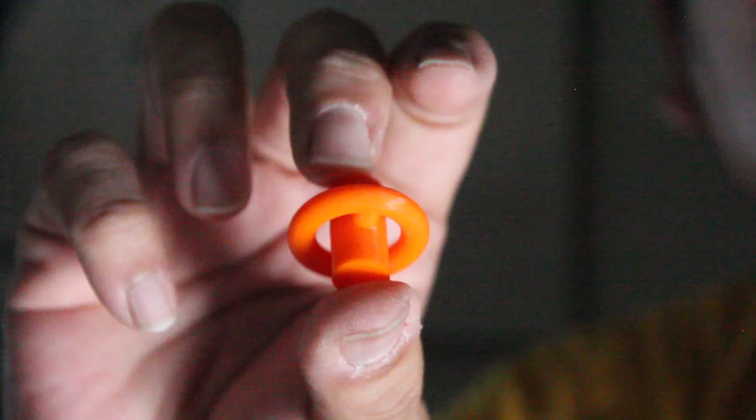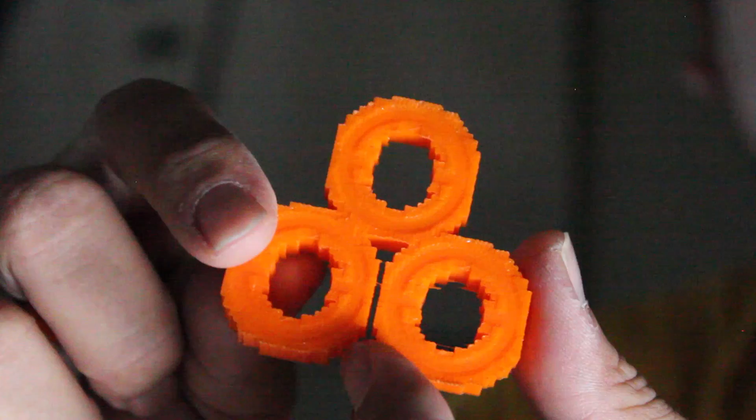This is the object I'm gonna try to explain to you, what settings I use to print it, as you can see by the supports right here. I printed 3 of these. They all came out quite alright. As you can see in this video, the print part came out really easily.

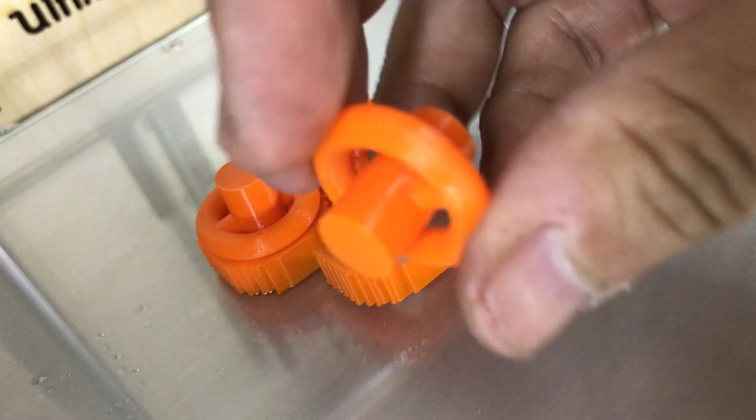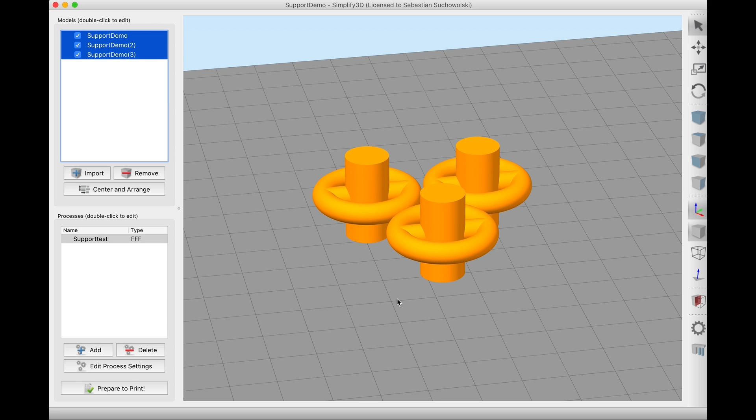Hello guys, today I'm gonna try to explain to you how to print complex objects that need supports, unless you have an Ultimaker 3, of course. But this object, for example, was a challenge from Dimensional because he printed this on an Ultimaker 3 and I told him that I was able to print this on a single head printer like the ones I have.

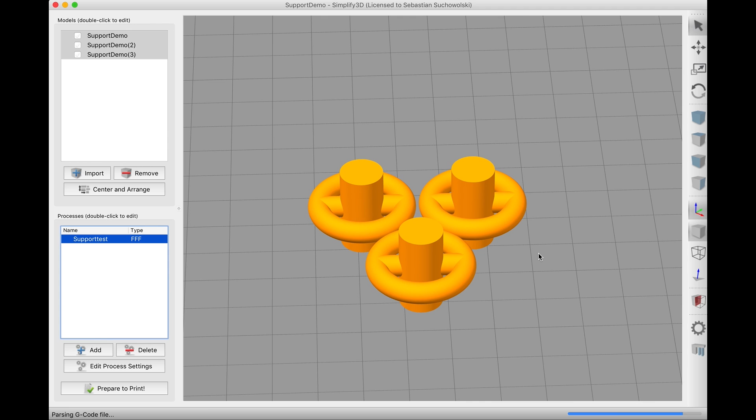So to do this, I had to use quite a few tricks on the supports, and if you see the G-code, you will see that most of the stuff is quite common, but there's a few buts. So for example, first of all, I print, as you can see by the color, everything around 30 millimeters per second, which is quite slow for what I used to like to do.

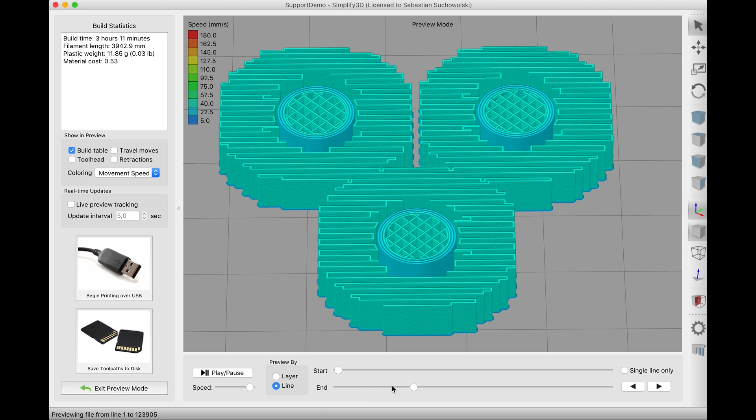Here you have the supports. They are all printed as much as possible as one unit, so you have a much more solid structure if it gets hit by the nozzle when travel occurs, which is something that can happen.

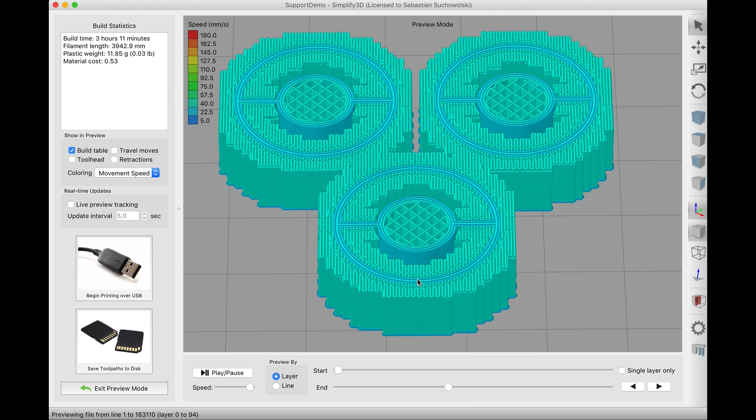And also I use dense supports before the print part starts, and I leave exactly one layer in between, which in theory should make an ugly look, but it doesn't, because what I try to do is to first print the most linear thing on the object on the opposite angle of the dense support.

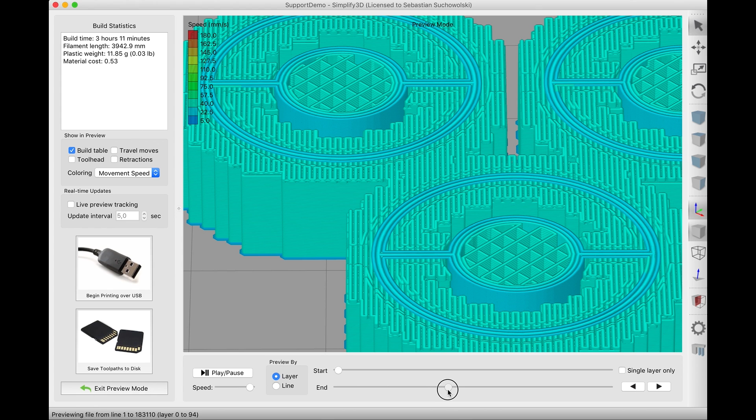So as you can see, I don't care much about the round part of this object, but these thin, horizontal, in this case, lines that go along the circle, etc. So also the jump between each layer is 0.8, which allows to get very small jumps in between.

So when you print, in this case, this is the start of the tubular thing of the object. From this layer to this layer, the jump occurs while there's enough filament on the previous layer, so only one layer is almost printed in the air. But because all the inside is being printed before, the line prints fine.

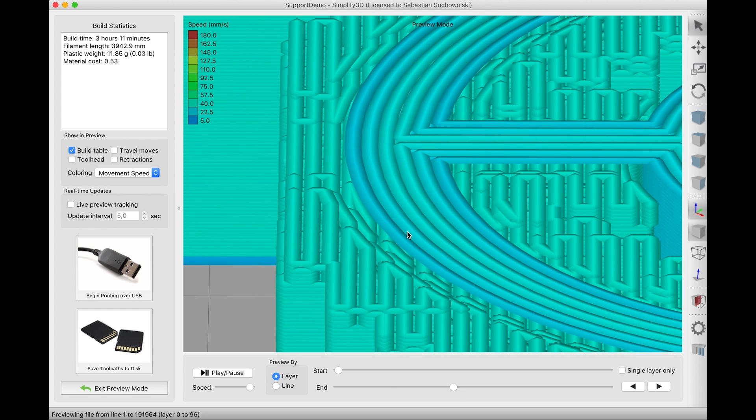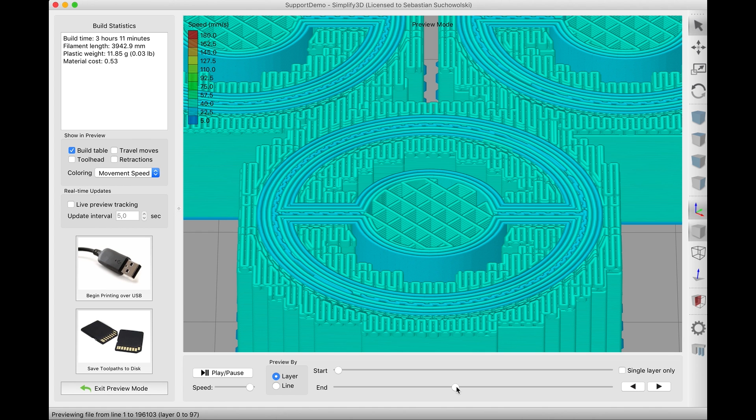Also, of course, I must say, I have a very powerful fan setup to avoid as much as possible that any of the two parts glue together. There are many parts that I might forget to even explain, but I want to give you a glimpse of what I do to print really complex supports.

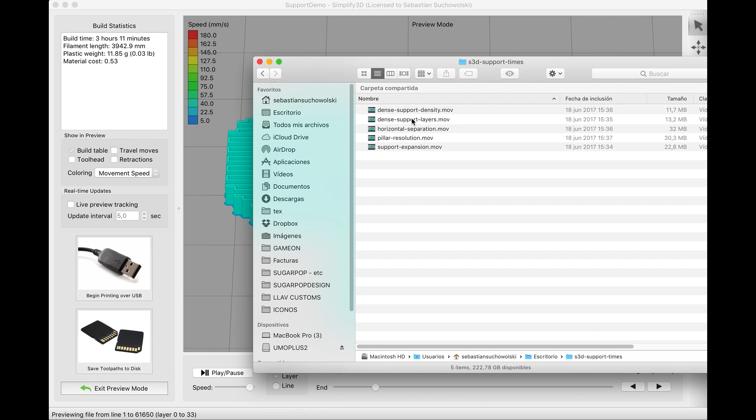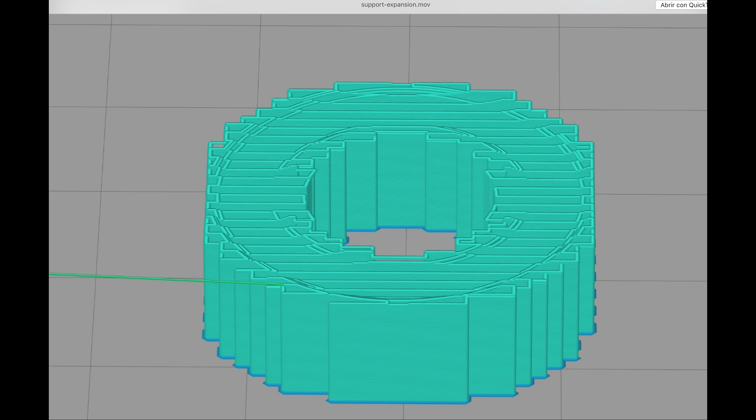So first of all, I use a lot of horizontal expansion. I will show you in a second what this is. Horizontal expansion, support expansion, is this. You can see it expands the area on which the support will occur. This is a video I made changing the settings. You can see the more expansion around this donut thing, the more the support expands and tries to support something.

So first I use that. Second, I use a very high amount of support density. In this case, it's around 35. If I remember well, the default is around 15, 25, something like that. As you can see here, I use a 1 millimeter extra inflation distance, which is this thing I just showed you, the horizontal expansion.

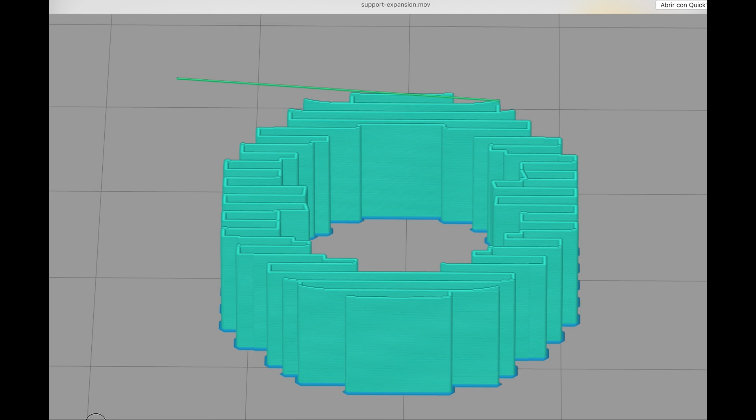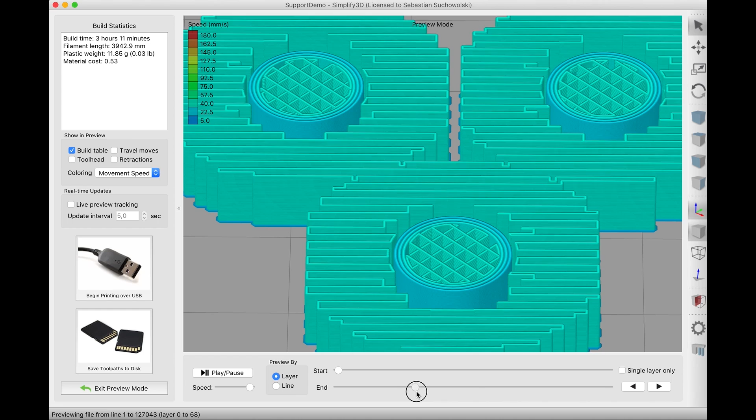Then, the other setting is 90% for the dense infill percentage, which is the amount of, let me show you this video, dense support density, yeah, this. As you can see on the dense support density, if you use too low, you leave a lot of gaps, which is not good for the objective.

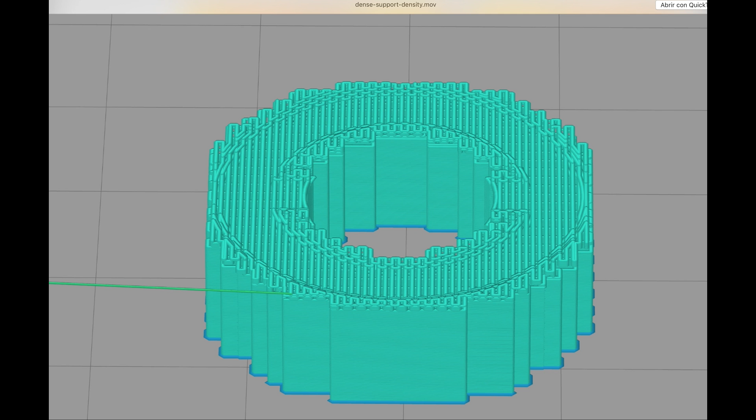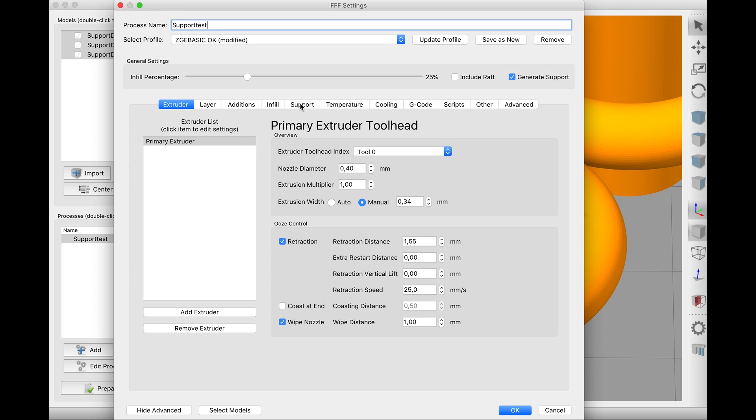My objective was, from the beginning, to be able to separate the print and have it as good looking as possible without any post-processing, which is, you know, what we all want to do when we print. The other setting is, well, you don't need to touch the print support of course, you want it every layer.

The other setting is this, the horizontal offset from part. By default, you have a 0.6 millimeters distance. That's okay for most stuff, but not when you are trying to print a circle and, well, a cylinder, a tubular cylinder in this case.

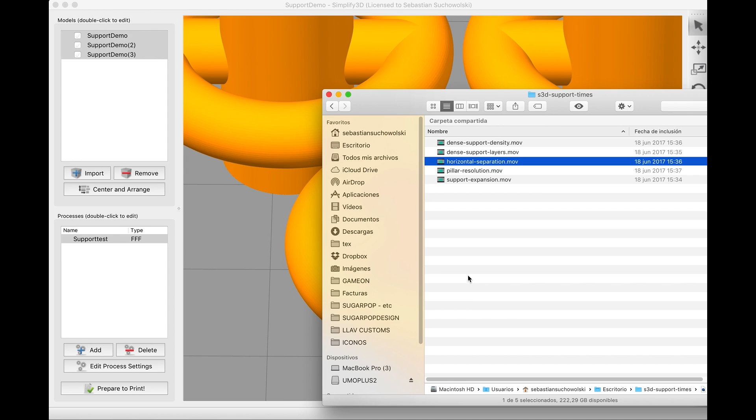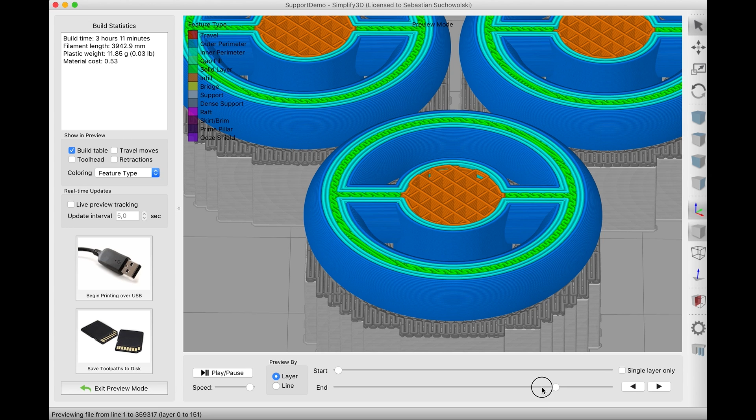Because, let me show you horizontal separation. As you can see, this value changes the horizontal plane of the support, so it goes closer or further away from the print part. This helps to avoid both parts being printed as one or fusing when they are being printed. It is something that can happen if you set it way too low.

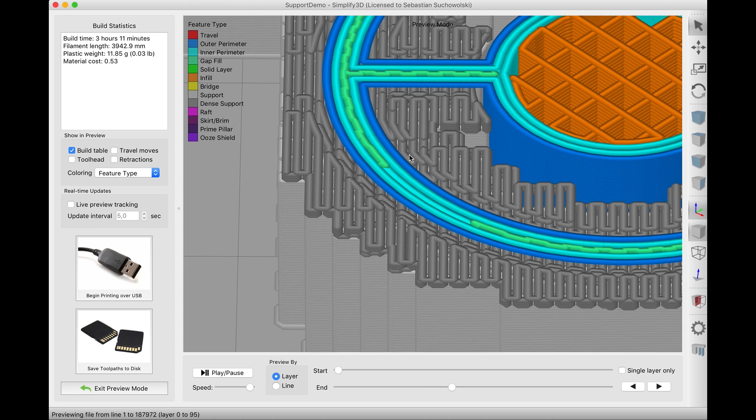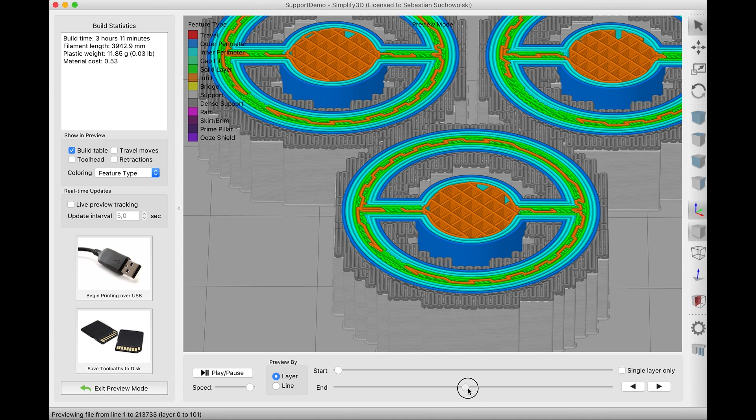So as you can see in this print, the distance is just barely enough, so when the next layer goes, they don't touch, as you can actually see, but also it has something very thin to be supported by. It's a complex concept to explain. Basically, it works.

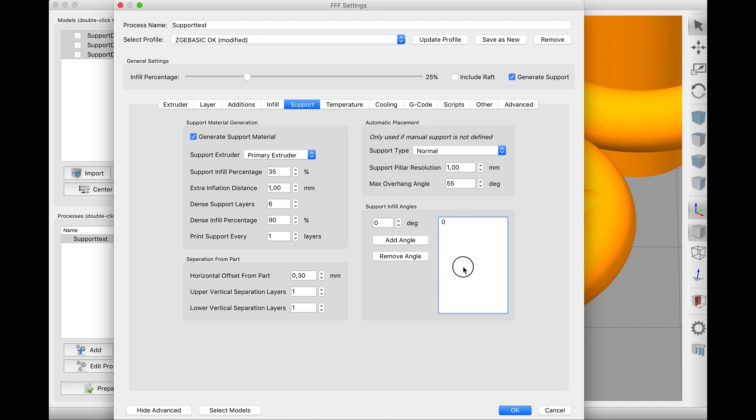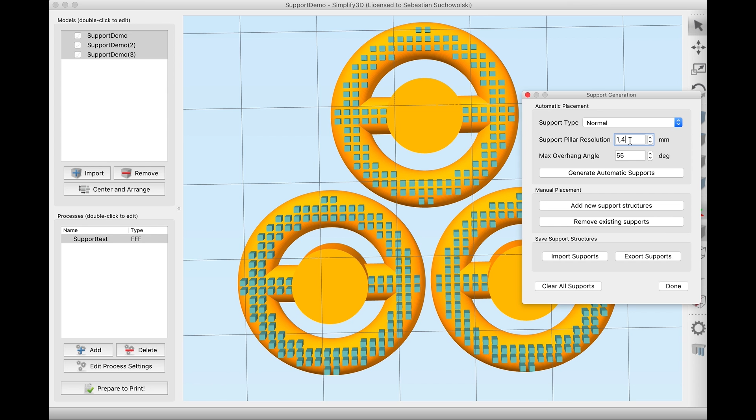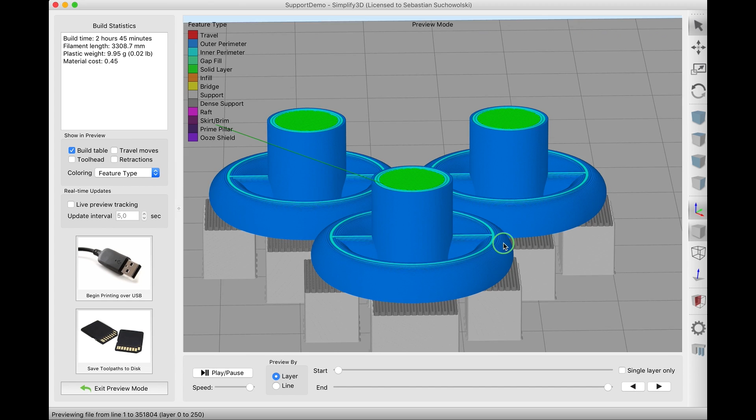As you can see, there are a lot of small points of, in theory, 1 millimeter that will check where the support needs to go. Basically, if you set it too high, in this case 4 is way too high, this will limit the areas of support and will make an ugly print, because if we use this for this size object, you will have unsupported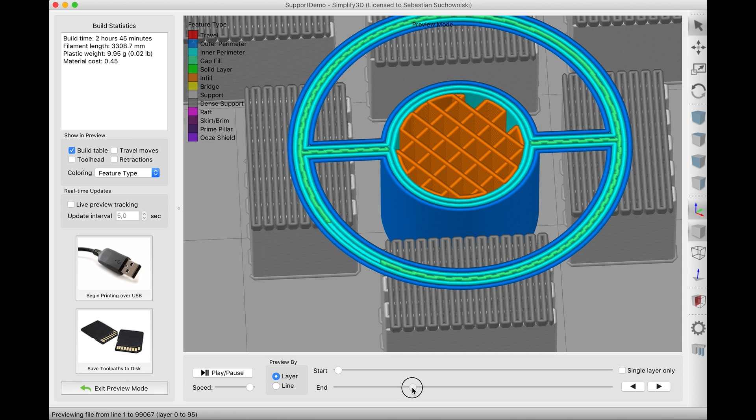areas that are really key, because you cannot print a curve in the air while shifting the angle, it's impossible. The print won't be curved. You will have a straight line if you're lucky, and it will look really, really bad, because as soon as you have one bad layer, the next layer will start to look better, but you will have that ugly bottom on the print that we try to avoid.

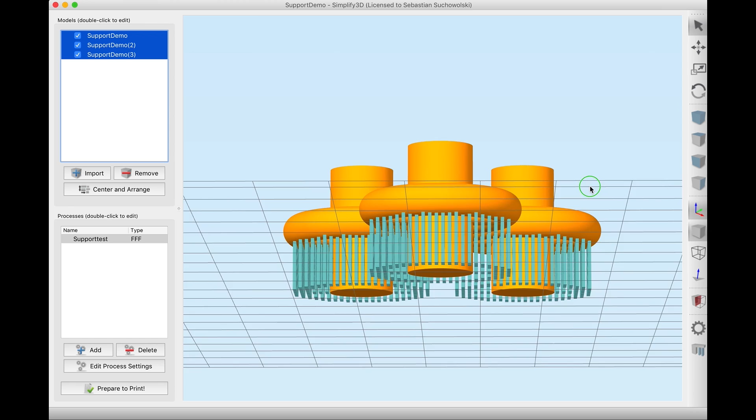So try to remember to use a good resolution for the object, because, as always, it really depends on the object you are going to print. So you have a nice resolution for the way Simplify3D thinks about the supports, and you can actually get a really good support on the areas that are impossible to print in the air by themselves. Like, for example, this curve.

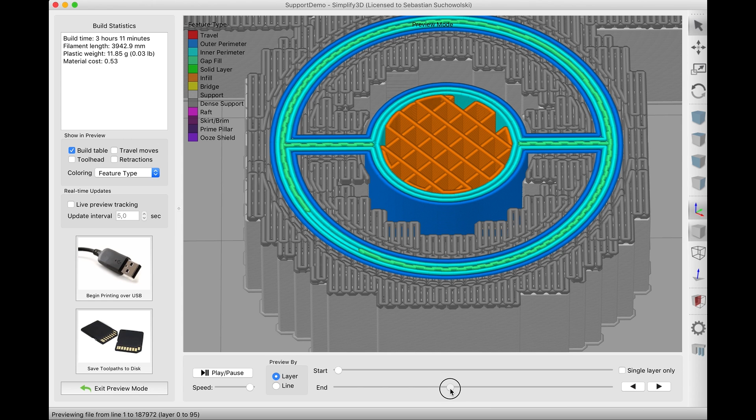As soon as you have this curve really nailed, you can build up from there. The next layer, the jump, because my layer resolution is 0.08, will be really small. And also, another thing really important, as you can see on the third layer of this cylindrical donut, I have a lot of perimeters. You can see here, let's go by line.

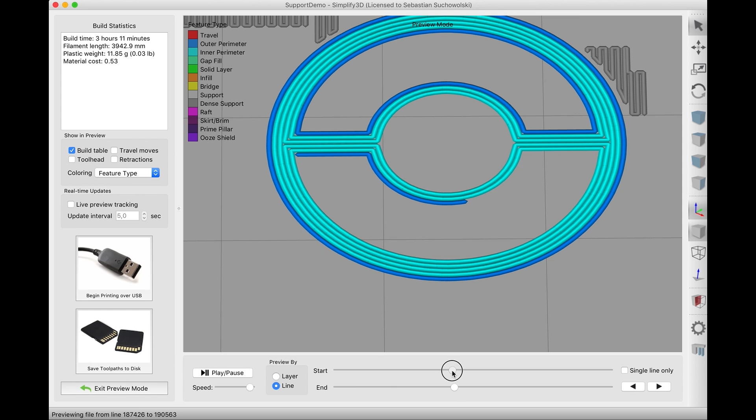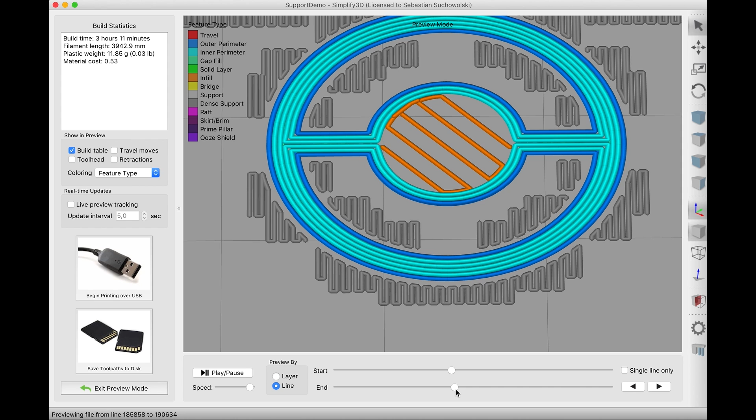This allows for the printed part to cool, because we are printing really small, really slow, layer by layer. Every layer has support over an adjacent layer, or is touching another layer, so everything becomes one, so to speak, and you have as much quality as possible.

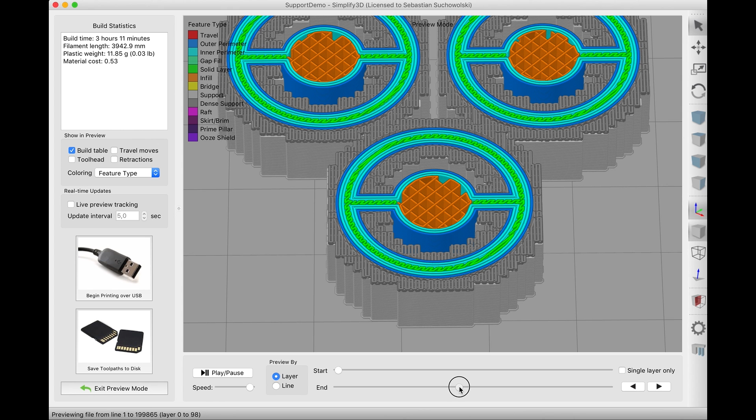Another really important setting is the amount of perimeters. In this case, for something like a cylinder, you need a minimum of 3, and I will use 4, maybe 5 if possible, because these very first 3 layers are the most complex and the ones that will be most visible, because for the next layers, the jump and the angle in between them is really small, and they don't even need support, as you can see here.

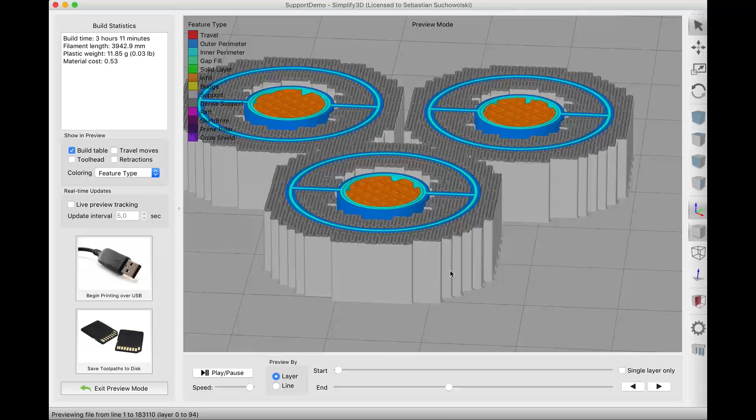All that area after those 3-4 layers is unsupported. It's just your fan, in this case, my fan, doing the work.

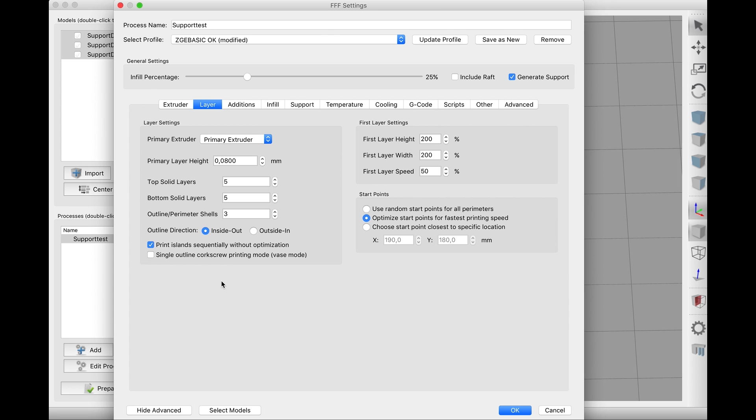So, another important setting to control is this print islands sequentially without optimization. This is key to get a nice print, because if you deactivate this, let me show you, you will have the nozzle hitting over a just finished layer over and over, instead of jumping to the next. So you will print A, B, C, C, B, A, B, C instead of A, B, C, A, B, C, A, B, C. So you get the idea.

By doing A, B, C, C, B, A, you are getting overheating on the A and on the B. If you're lucky, because sometimes this is random, you will have a perfect one.

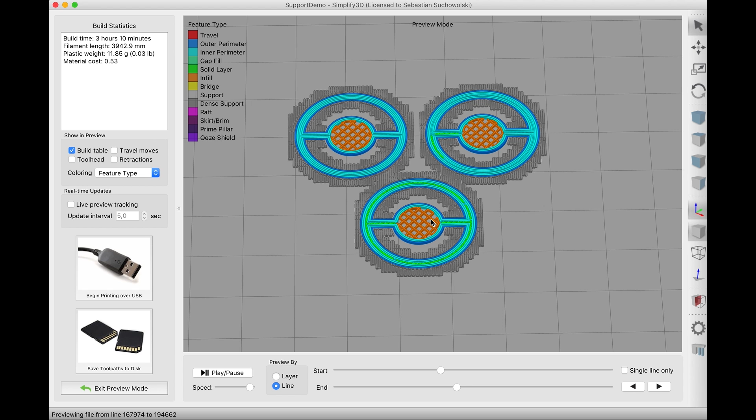One will be perfect in the middle, but that sucks. You want to have the three perfect. So you want to have a print layer order that is not optimized for speed, but for quality. So it does one, goes to the next, then goes to the last, and then starts with the next. It doesn't, because to save time, Cura or Simplify3D by default does A, then B, then C, then changes the layer height and prints again over the C.

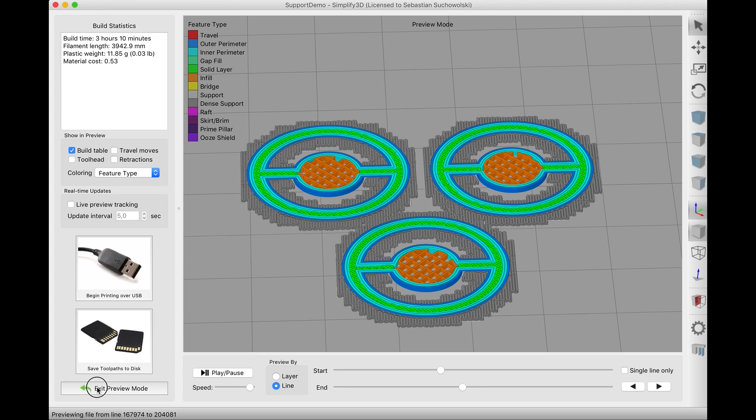So the time that each part gets cooled down is different. So you will have worse quality, especially when you are printing really complex overhangs like this that are supported. You need as much cooling as possible. Not just by fan, but you need to let the material cool down.

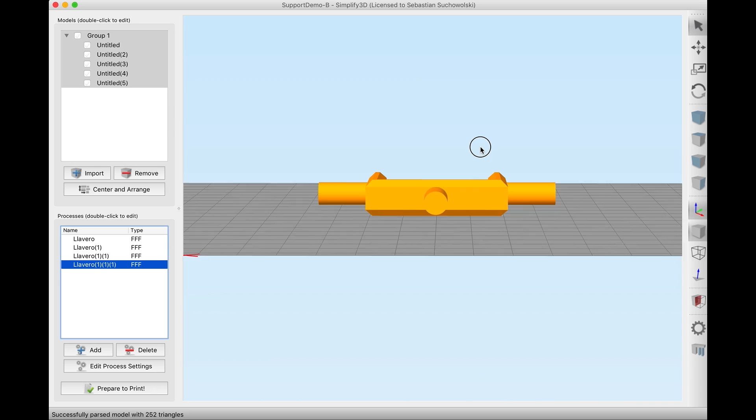Okay, this is a boring video, guys, but I'm trying to give you some of my knowledge. I will show you another example, because this is really easy. This is an object I just made up, okay? It has circles in the air and you cannot print it. For this example I want horizontal structural integrity, so I don't want to print it upside down, because the strength of the part will be lower.

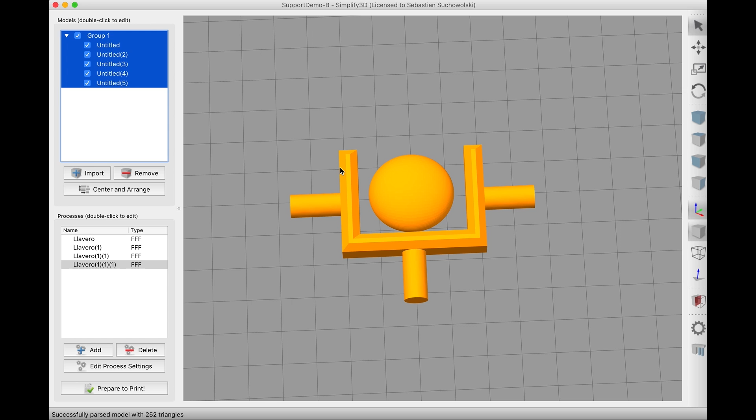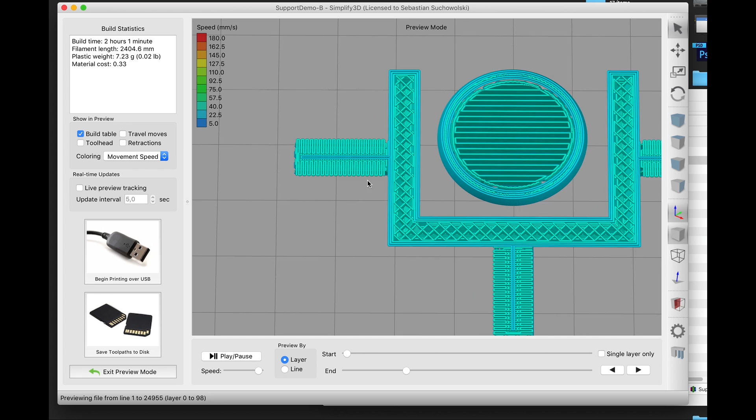I made this object, and when I did it, I separated the parts so I can work the supports at different angles. And why is this important? As you can see, these two lateral sticks get a support that goes vertically and the bottom goes horizontally. I do this because when you're printing an object, let's change the feature type, this print area goes at a different angle from the support.

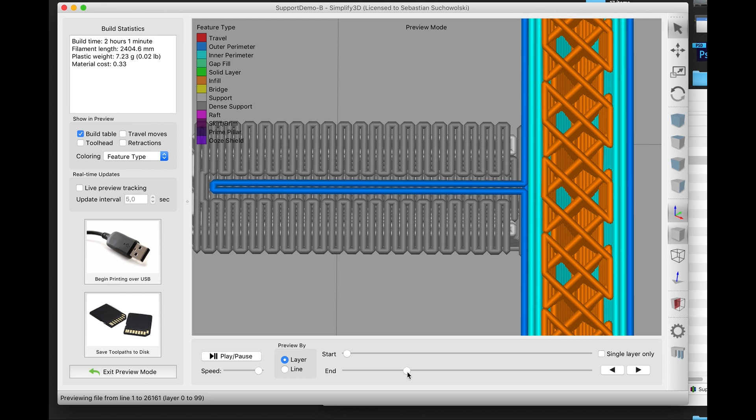You should try to avoid printing an object at the same angle as the support, because it will fuse one with the other. Why? It just does. When you're printing objects at the same angle, and in this case the support is an object, if they share the same angular distribution, they are more likely to get fused, and it will be much harder to separate them, and you will have to post-process the part.

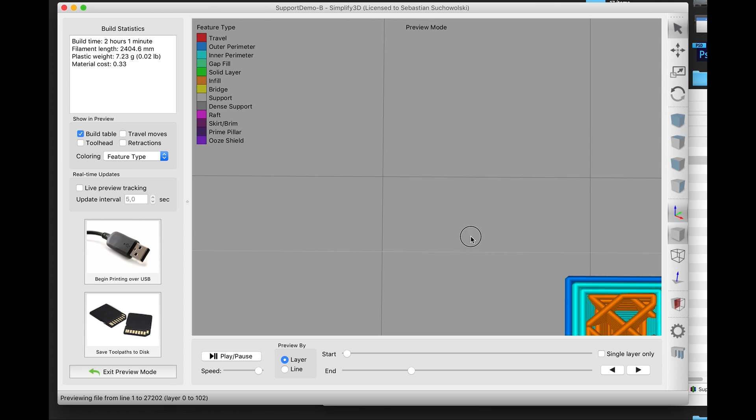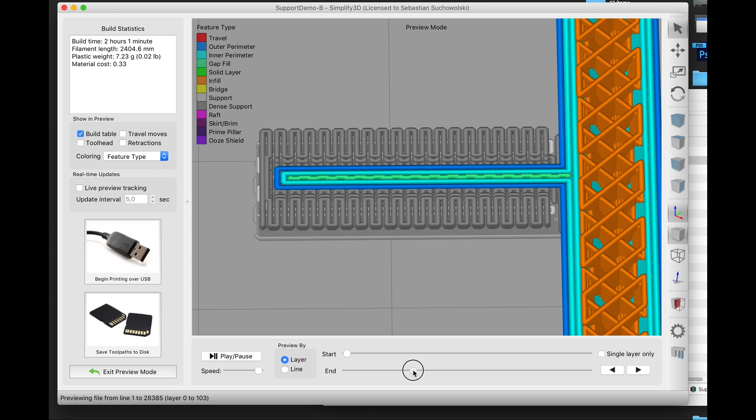If the support is solid enough, like in this case 6 layers of 0.08, this will split because the support is one object with one structural shape, and the printed part doesn't share that angle and is part of the other object. So it will be so easy to split them. You might need some tuning, but it will look really nice.

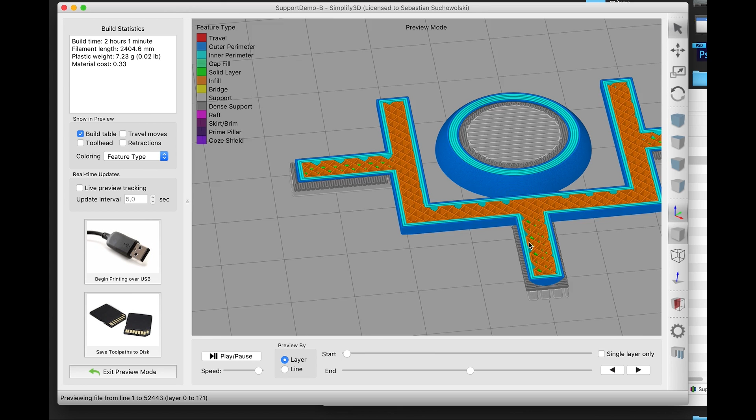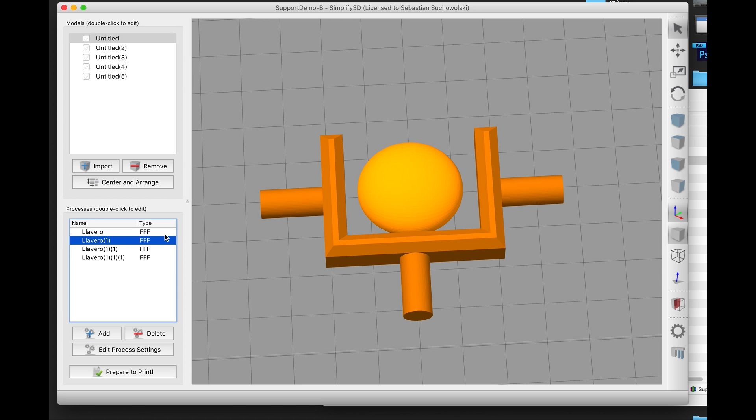So by doing this trick I will explain in a moment, you can actually customize the angle of the dense support. In this case, as you can see, the bottom prints nicely at a different angle. So the trick is really easy. First, you need one process, let's remove this dome, this really bothers me. Okay. We have the print process, let's call this print.

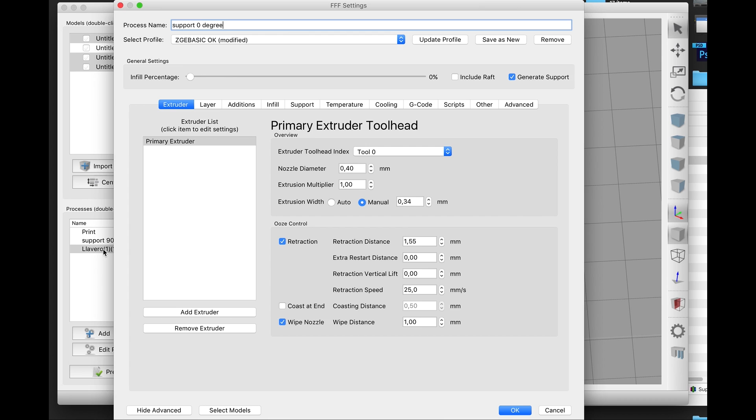Here we have the support 90 degrees, and here we have the support 0 degrees. I'm gonna save this to share it with you guys. As you will see in the file that I will put down below in the description, this support has 0 infill, 0 top layers, 0 bottom, 0 outlines, and of course, island sequencing without optimization.

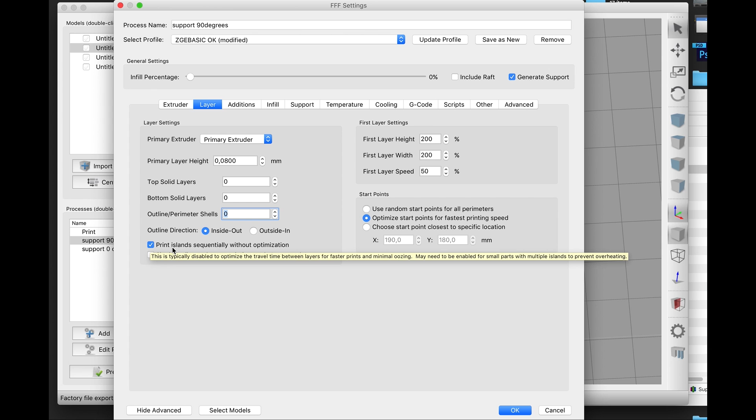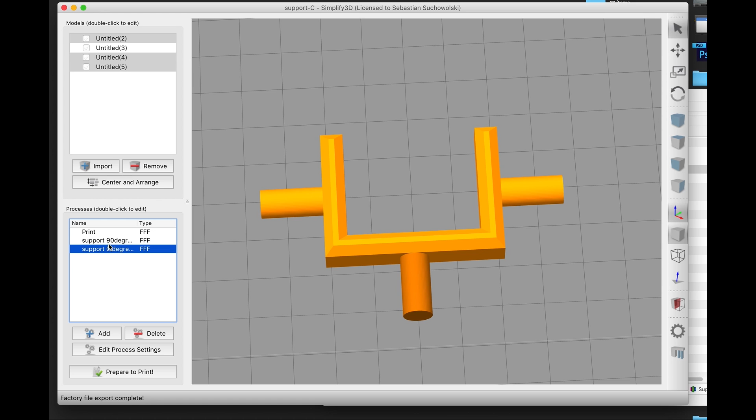And for the other object, we have the same. No infill, no top layer, no bottom, no outline, just support. This means that this two-process setup will give you this error. It will tell you you're trying to print the same model twice. Don't worry. You just click this, and you will see that the two support processes are working, doing the supports for the objects you need, in the angle and orientation that you need, which is something really cool.

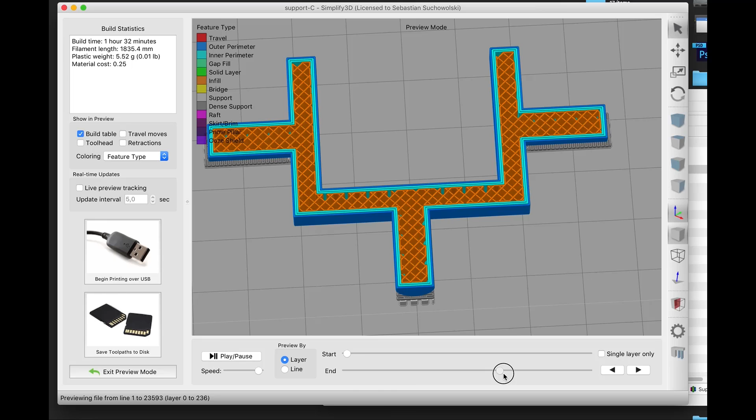I just found out the other day, I don't remember. I was playing with the idea and it just came to me. The problem is that when you make the object, you need to remember to be able to split the parts. Just save them separately. This is a lame example of what you can print, of course, but I wanted to show you complex round supports like on the other object.